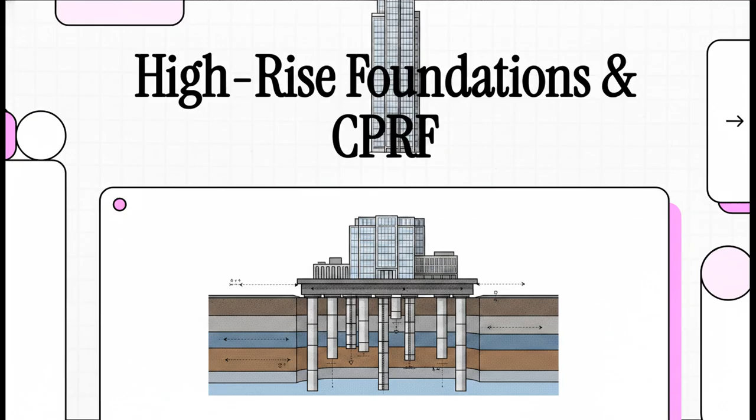If you're a civil engineering student or honestly just someone fascinated by how we manage to scrape the sky with these massively heavy structures, you are absolutely in for a treat today. We're looking at a huge structural paradigm shift in geotechnical engineering. We're going to explore exactly how the foundations beneath our feet are evolving, specifically diving into a game-changing concept that is literally reshaping how we support the world's tallest buildings.

Let's kick things off with a pretty massive, real-world number. How could a single engineering decision save nearly 3.9 million euros on a skyscraper's foundation? Well, that is exactly what happened with the 256-meter-high Messeturm Tower over in Frankfurt, Germany. By changing just one core philosophical approach to how they designed the concrete beneath the ground, the engineers saved millions, and they did it without compromising a single ounce of safety. Understanding exactly how they pulled this off is absolutely essential for your future careers.

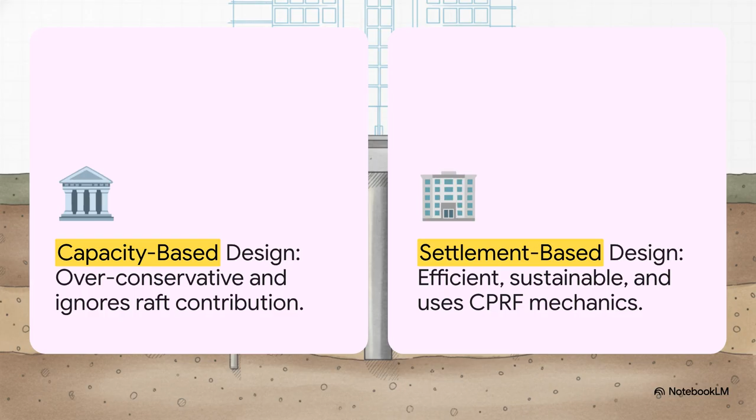So, to understand that massive saving, we really have to look at this fundamental shift in engineering philosophy. We're moving away from the old paradigm, which is this over-conservative, capacity-based design, to a completely new paradigm, a highly efficient, settlement-based design. You know, the old way just throws a ton of concrete and steel at the problem just to be safe. But the new way uses brilliant, calculated mechanics to use exactly what is needed to control how much the building actually settles into the earth.

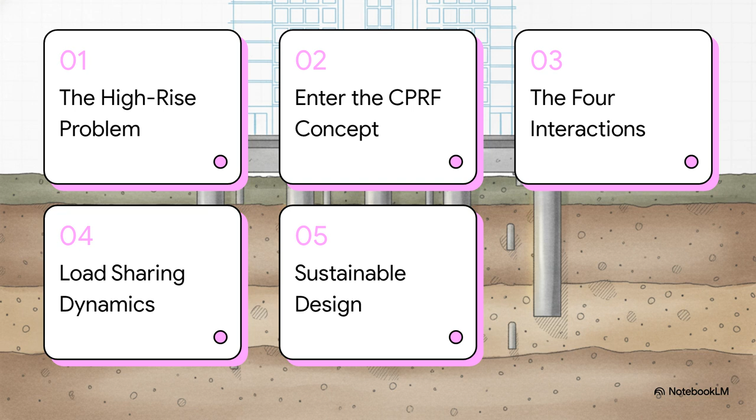Here is our roadmap for today's Explainer. We'll start with the high-rise foundation problem, introduce the CPRF concept, dig into the four crucial interactions, break down the load-sharing dynamics, and then finish up with sustainable and economic design.

Okay, Section 1. The high-rise foundation problem. Specifically, outdated design codes. Every good engineering story needs a villain, right? And in our case, it's these overly conservative regulations. So here's the critical flaw we've been dealing with for decades. When engineers needed to support a really heavy high-rise, they designed a massive concrete raft. Now, if the soil wasn't perfectly stiff, they just add deep piles underneath it.

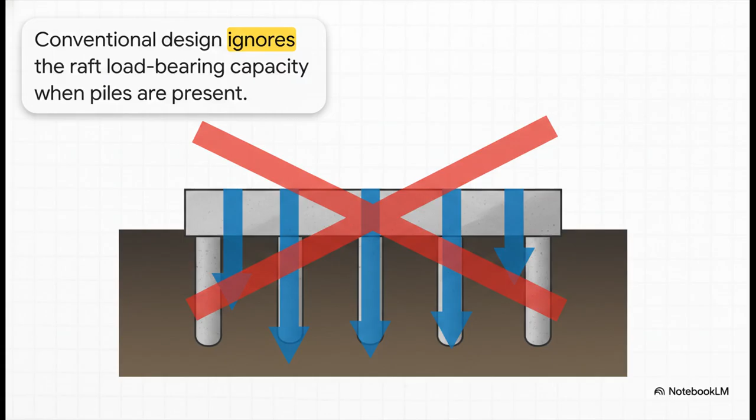But here is the crazy part. Traditional regulations often force engineers to design those pile groups as if the raft isn't even there. They're forced to totally ignore the raft's load-bearing capacity, meaning the piles are designed to carry 100% of the building's weight. It's wildly redundant and leads to massive, expensive over-conservatism.

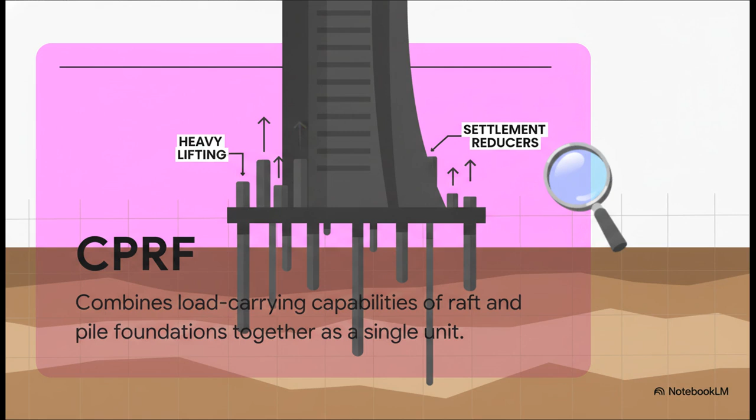Which brings us to Section 2. Enter the CPRF concept, our hybrid foundation. This is the real hero of our explainer, a system that finally forces the raft and the piles to communicate and actually collaborate. So what is it? A combined pile-raft foundation, or CPRF for short, is a hybrid foundation system combining the load-carrying capabilities of both the raft and piles as a single cohesive unit.

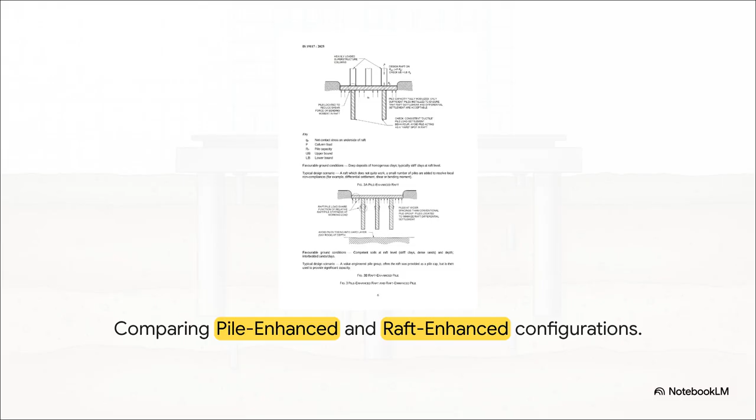Moving right along to Section 3, the four crucial interactions: soil-pile-raft mechanics. It's time to take this explainer underground and visualize the complex, invisible mechanics that make this whole system tick. You see, when you combine a raft and piles, it's not just simple addition. The soil sandwiched in between them creates a highly complex interaction zone. There are four distinct interactions you have to calculate.

First, pile-soil interaction, which is the friction along the pile. Second, pile-pile interaction, basically how one pile's stress affects its neighbor. Third, raft-soil interaction, the contact pressure of that massive concrete slab on the dirt. And fourth, the absolute most vital one, pile-raft interaction. The way the raft pushes down on the soil actually changes how the piles beneath it behave.

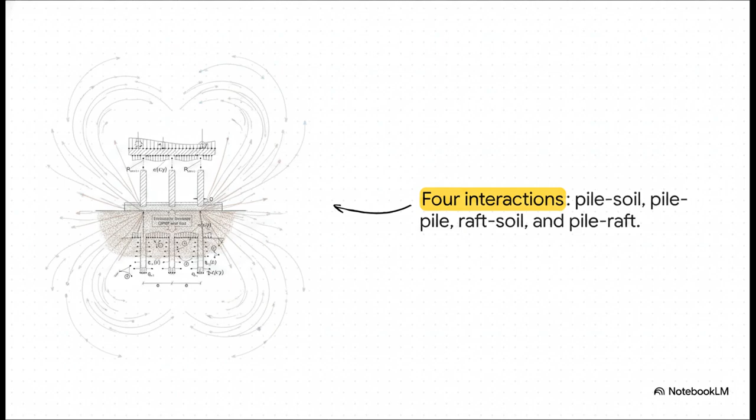Now, the physics of that interaction? Absolutely mind-blowing. Initially, you get this negative interaction, because as the raft pushes the soil down, it actually reduces the relative friction the piles can generate against that soil. But as the building settles further, this shifts into a positive interaction, where the combined stiffness of the soil and piles unlocks the raft's true bearing capacity.

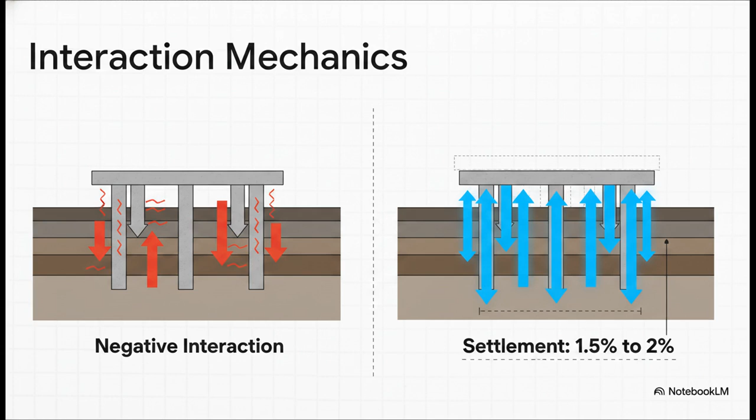And get this, research shows that the piles magically mobilize their full capacity only when the foundation settles to about 1.5 to 2% of the raft's total width. That right there is your operational sweet spot. Now, obviously, because these superposition effects and stress fields are so incredibly complex, you are not calculating this on the back of a napkin.

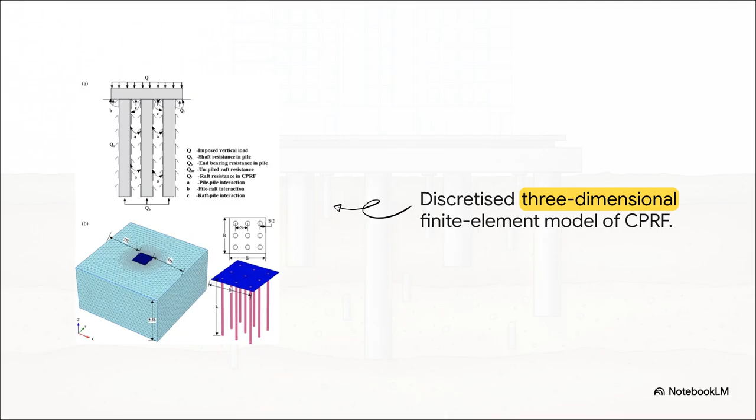Geotechnical professionals use advanced discretized three-dimensional finite element models like Plaxis 3D to simulate the CPRF in sand or clay. This software is what helps us visualize those invisible stress webs to prove that the system will hold up under massive vertical loads. Which brings us to Section 4, Load Sharing Dynamics.

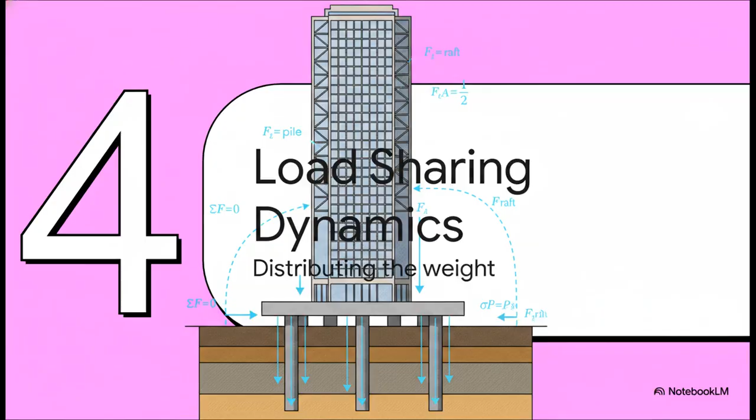We've seen the physics, but how do we mathematically distribute the weight of a skyscraper across all these components? The absolute most critical variable you need to know for CPRF design is the alpha CPRF coefficient. It's essentially just the specific ratio of the load carried by the piles divided by the total vertical load imposed on the entire foundation. Very simply, it tells you exactly who is doing the heavy lifting.

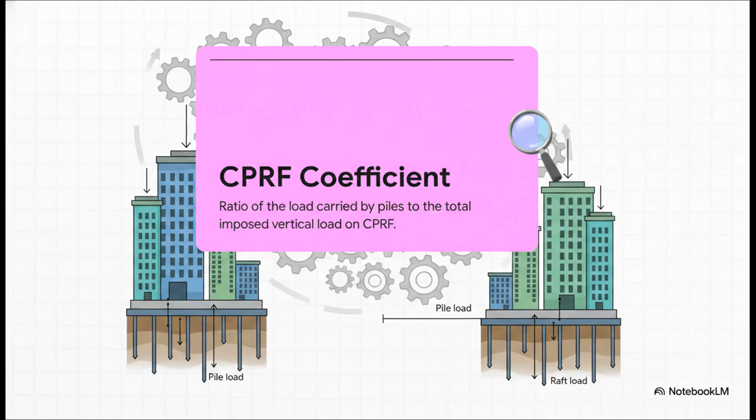Think of it as a sliding scale. If your alpha CPRF is exactly 0, the piles are doing absolutely nothing. You just have a pure spread raft foundation. On the flip side, if your alpha is exactly 1, the raft is doing nothing and you've got a pure conventional pile group. To actually utilize the CPRF method and have these components truly collaborate, engineering codes specify this coefficient has to sit right in the sweet spot between 0.0 and 0.9.

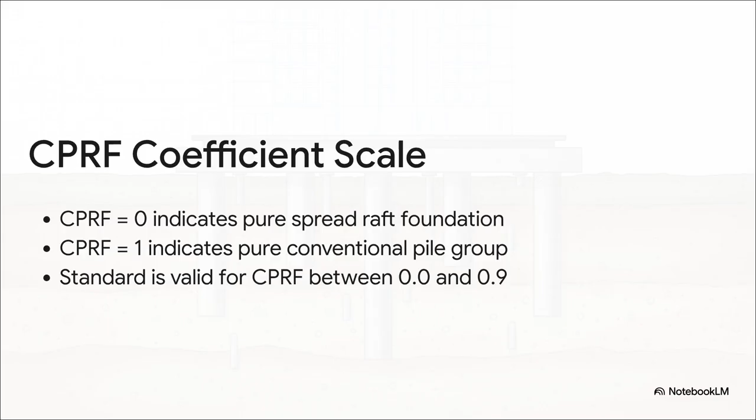Compare that to the old way to see how this builds a much better mathematical model. The old method was incredibly simplistic. You're just summing up individual pile capacities independently. The new CPRF method is highly accurate. To find your ultimate limit state, you calculate the capacity using specific interaction multipliers, alpha PR for pile-raft, alpha PP for pile-pile, and alpha RP for raft-pile. By factoring in those interactions, your mathematical model suddenly perfectly aligns with physical reality.

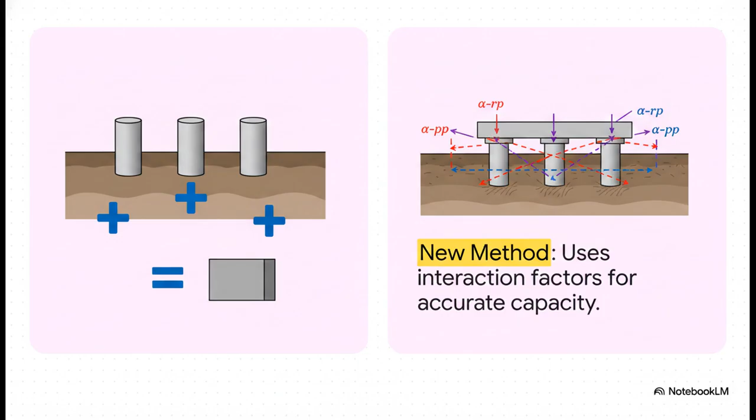And finally, Section 5, Sustainable and Economic Design. We know the math works, but let's look at the real-world professional impact of actually adopting this advanced methodology. In practice, implementing CPRF takes 3 mandatory stages. Step 1 is the preliminary stage, which is basically a feasibility study to see if the local soil profiles even allow for this setup.

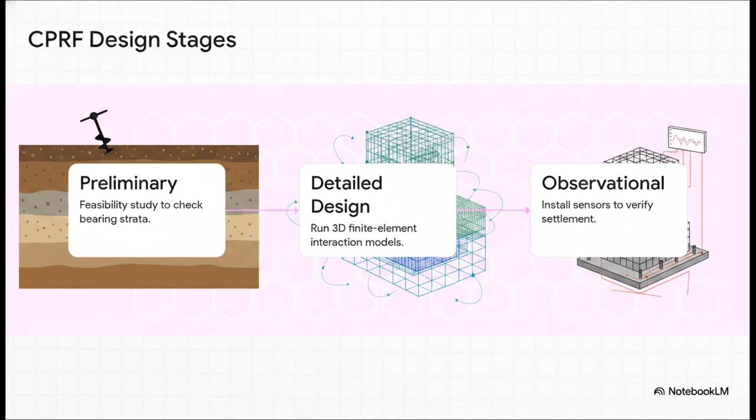Step 2 is the detailed design stage, where you're running those heavy 3D finite element models we just talked about. But step 3 is what makes this truly safe, the observational stage. In the real world, engineers actually install sensors to verify that the settlement models match the physical, real-time sinking of the building during construction. That real-world verification is key.

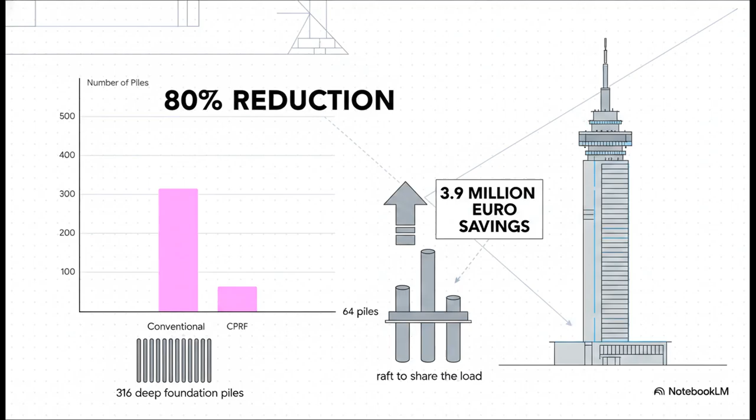Okay, remember that massive 3.9 million euro saving we talked about right at the beginning? Here is the visual proof of exactly how they did it for the Messeturm Tower. A conventional group pile design would have required 316 deep foundation piles. By utilizing the CPRF design and allowing that raft to share the load, they reduced that to just 64 piles. That is nearly an 80% reduction in pile count. Just incredible.

The ripple effects of that are just huge. Economically, fewer piles means millions saved in material and labor. It's incredibly sustainable, slashing concrete and steel usage. It's highly efficient, resulting in significantly faster construction times for the crew. And above all, it remains perfectly safe, providing exceptional, mathematically proven settlement control.

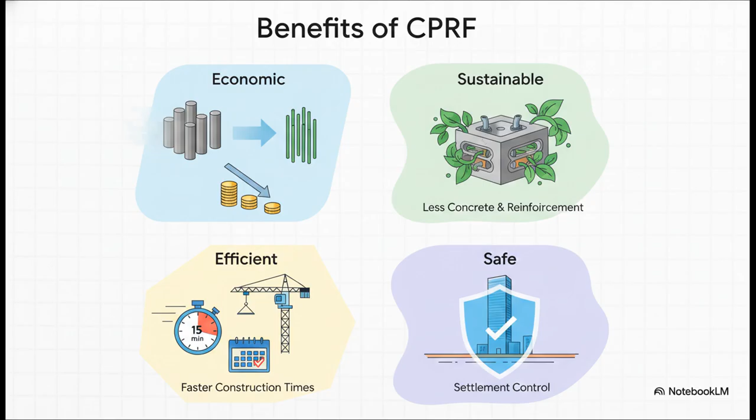So, I'm going to leave you with a question to think about. As the civil engineers who will literally be building our future skylines, the choice is yours. Are you ready to embrace the complex, highly efficient, and sustainable mechanics of the foundations of tomorrow, or will you stick to the wasteful, conservative codes of yesterday? The math is there, the software is there, and the millions in project savings are right there for the taking. It is entirely up to you to champion this CPRF paradigm shift.